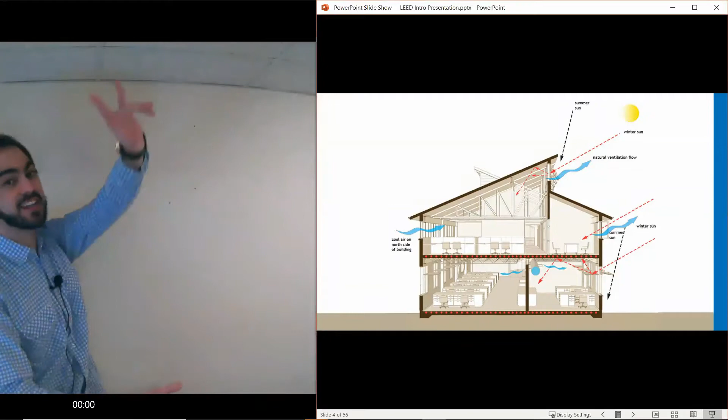Now, this is what modern day passive ventilation and passive solar looks like. If you look up at the sky in the summer, the sun shines on a high southern angle tilt. In the winter, it's at a very low winter tilt. Block the unwanted heat from the summer sun with overhangs on the south facade, and give us free solar heat gain in the winter. Maybe you can passively cool your building.

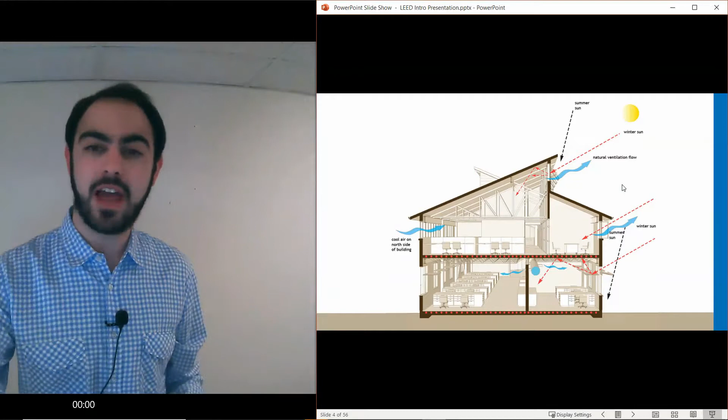There's a lot of moderate days, especially on the West Coast, and perhaps you don't need a mechanical air conditioning or HVAC system, and you can bring cool air from the north side of the building and duct it out the hot south. There's a lot of principles and design possibilities that don't rely on mechanical and electrical equipment, but can really help in not needing them to be used all the time.

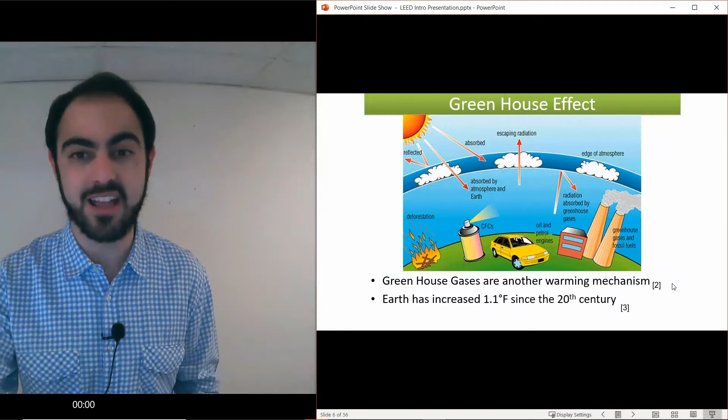Now, a little bit more history. We know we have a bit of a carbon dilemma. We've seen over history our carbon levels have gone up and down, and then since the 50s they've just been on an exponential rise. Why is that a problem? Well, you've heard of the greenhouse gas effect. That carbon, those greenhouse gases, trap extra heat in our atmosphere and create more climate change, warming, cooling, and a lot of other adverse effects on our planet, which we've always been talking about recently.

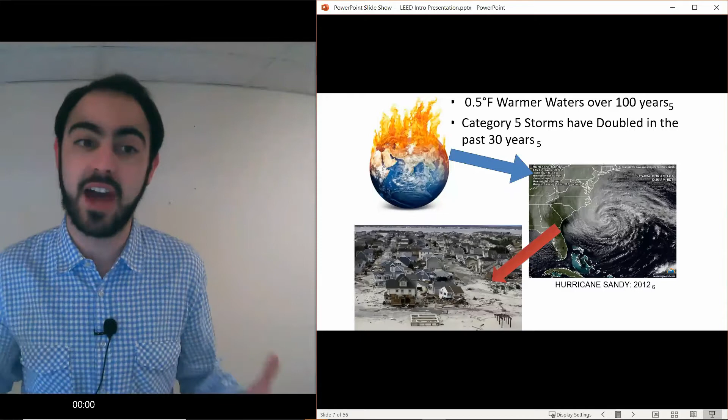Not only does the air warm, but so do our waters. Warmer waters are breeding grounds for more vicious hurricanes, and we've had enough of those in the last decade every couple years. There's drought worldwide. There's statistics that 1 out of 3 of us, every single year for the last 5 years, have been living in water stress conditions at some point. It's a real risk. Water is not infinite. In fact, it's finite, especially the fresh water, which I'll talk more about.

And really just combating our pollutants and other adverse effects, which are often overlooked. This is something that LEED is going to try and help fix. But there's a lot of people out there that are naysayers to climate change, regardless of the evidence.

And to those people, I kind of frame the argument in a different way. Look, the Earth is made up of a finite amount of resources, and the Earth has been generous enough to share them with us. They're unevenly dispersed. In Canada, we're lucky, we have lots of resources. However, they are finite, and the rate that we are consuming them is just nonsensical. Regardless of climate change or not, the more we use, the less we'll have, and the more expensive each resource will be. It's not efficient and it's just short-sighted. Eventually, we're going to run out. So whether it's for climate change or just because we depend on a sustainable future and actually having enough resources for future generations, this is the right place to start.

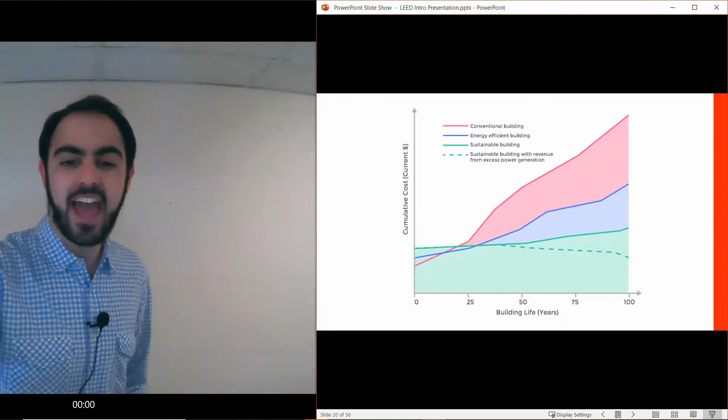I'm really hoping that if my building can satisfy a lot of people's wants and needs in each of these spheres, I'm going to get a sustainable building in the middle. When I go through all the credits, this is always in the back of my mind, thinking how these ideas relate to a more sustainable building or a more sustainable planet. It's really the basis of sustainability.

And what we just talked about was the profit side, with that high return on the initial investment to build a green building. But what about the people, you and me? Where are we coming into this conversation?

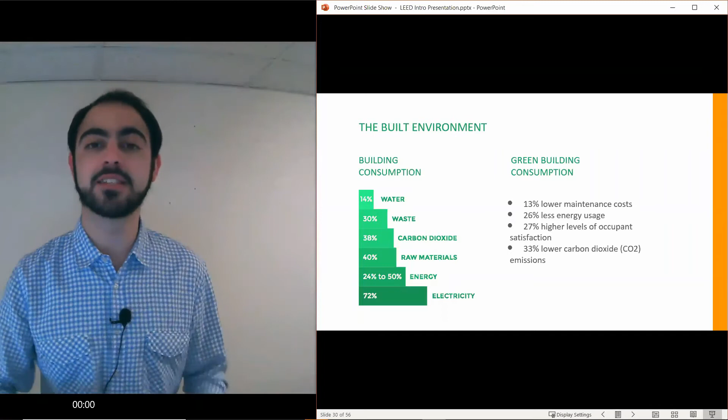So if economically it makes sense to focus on reducing our consumption as much as possible instead of building up new capacity, we should probably go for the biggest consumer, which are buildings. Buildings consume almost 50% of our energy, 72% of our electricity, and produce a whopping 38% of our carbon dioxide emissions. So if it makes sense to attack the largest fruit on the tree of energy consumption, let's do it. That is one of the largest parts of LEED in our courses, focusing on how our built environment can lessen its impact on the planet, people, society, and the economy.

I mentioned that LEED incorporates really good existing proven tools like life cycle assessment, which is out there, but people often overlook or don't incorporate it. LEED takes these principles and incorporates them within the credits, so often builders use them without even knowing. The whole idea of life cycle is not just looking at one stage of a product or building's impact, but its entire life—what happened when you transported it, used it, created it, end of life, where does it go?

I get into these a lot more in my classes, but these are kind of the 7 ways and impact categories of what LEED deems as important. So you see, number 1, we're trying to reverse our contribution to climate change. We're looking at human health and well-being improvements, protecting our water, our biodiversity, our other resources, a greener economy, and just overall social equity are the impact categories we talk about.

Now, I just want to briefly touch on the different rating systems. I mentioned them when talking about the LEED AP. One thing I love LEED for, recognizing over the years, is different buildings have different needs from a sustainable standpoint. So there's 5 rating systems, which I mentioned already, for new buildings, for existing renovations, retrofits. But within each of those, there's also market adaptations, because a new school has a few unique credits versus a new data center. They've really made it a lot more specific and pertinent to the building types, which I like.

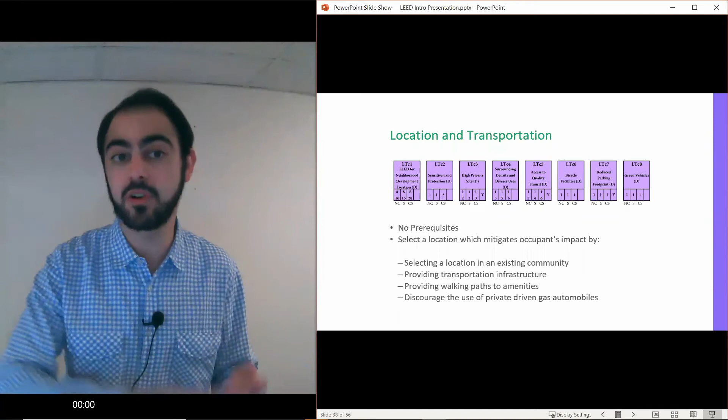We look at how people are going to get to the building. Is everybody driving alone in a big gas guzzler, or is there access to public transit? Is it bikeable? Do we have green vehicle and carpooling incentives? And that's location and transportation.

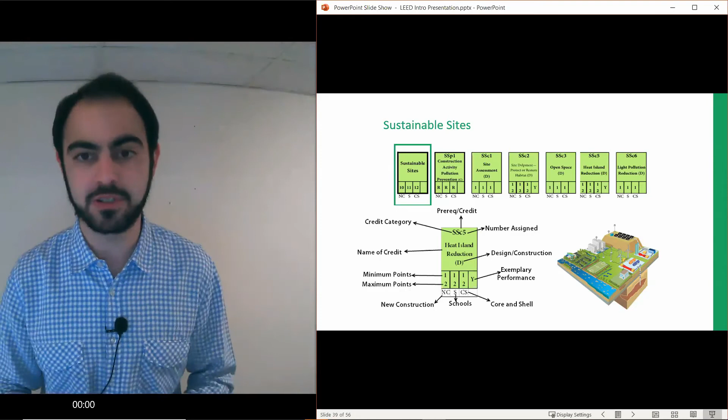Sustainable sites, and this is my little legend about how I've named the credits, which you don't need to know until you take the class. Sustainable sites looks at construction pollution, managing rainwater, reducing the heat island effect and light pollution—everything to do with the actual site itself.

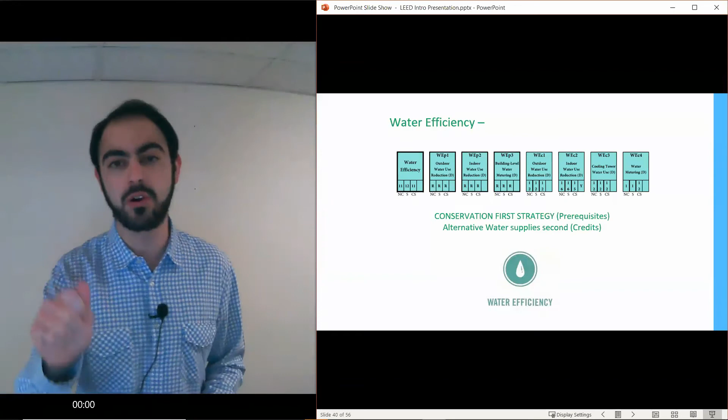In water, we look at water efficiency not only inside the building with our flush and flow fixtures, but also outdoor water use with our irrigation, and perhaps using non-potable water, such as recycled rainwater, to offset our other potable water uses. It's all about lowering potable water usage in and around the building, because it's a finite resource.

Energy. Look at Canada—we're number one, we are the best, we're the worst. We use the most energy per person in the world. Crazy, why? Well, luckily a lot of people have access to energy here. Not so luckily, it gets really cold here, and it gets really hot here. And relative energy costs are cheap, so we're not afraid to use it. And that's why it looks like this.

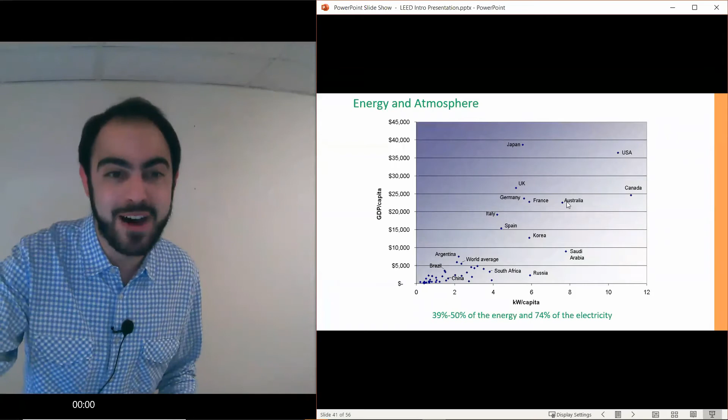But how I look at this waking up every day—this is the easiest time to get in the industry. It's the best time. We're never going to have this much to improve on. It's the easiest time to improve. So there's your Canadian optimism.

So for energy, briefly, we talk about something known as commissioning, which is really verifying that these unique systems are installed properly. We talk a lot about energy modeling, which is a whole field in itself, as is commissioning an entire field in itself. And we talk about how LEED incorporates those, and all different ways to possibly improve the energy efficiency of the building.

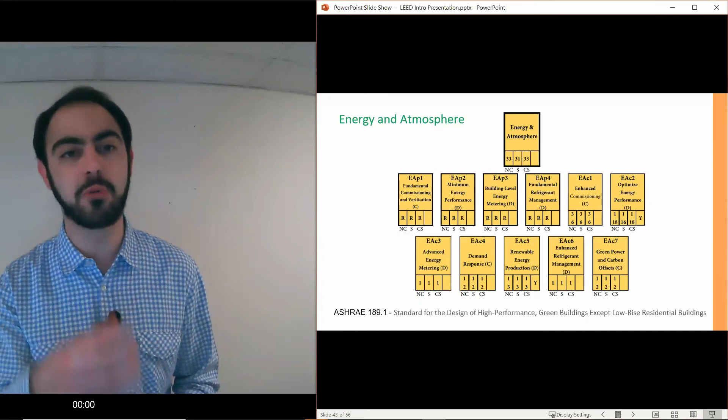Now, we also talk about refrigerants like Freon or chlorofluorocarbons in our HVAC systems, our air conditioners. We try to meter, we look at demand response programs and renewable energy generation on-site and off-site, and that's energy.

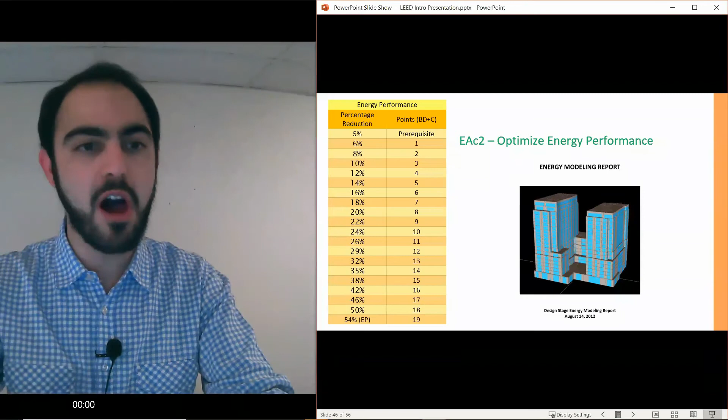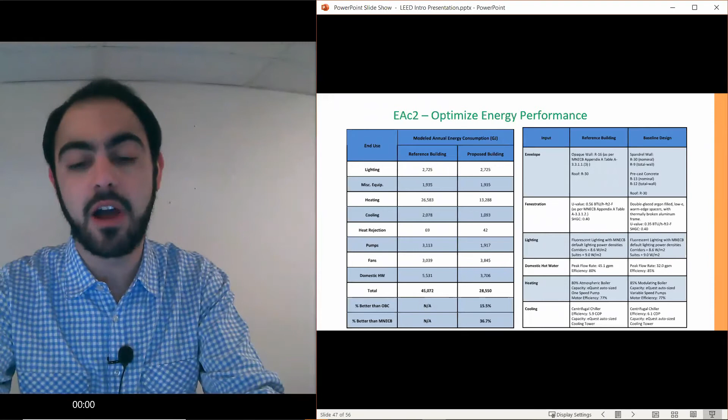This is just the energy prerequisite and credit, and I just wanted to show you an example of a baseline that we have to compare our new building to. LEED piggybacks, as I said, off of other standards to try and beat them and be green. Here's an example of an energy model and how the points break down, and the different numbers I need to collect and provide LEED with so they can verify that our building is doing what it's supposed to.

Materials and resources are our next major one, and there's two elements of it. Number one, where do your products come from and how are they made? And then, where are they going to go at the end of their life? That's the big deal behind materials and resources.

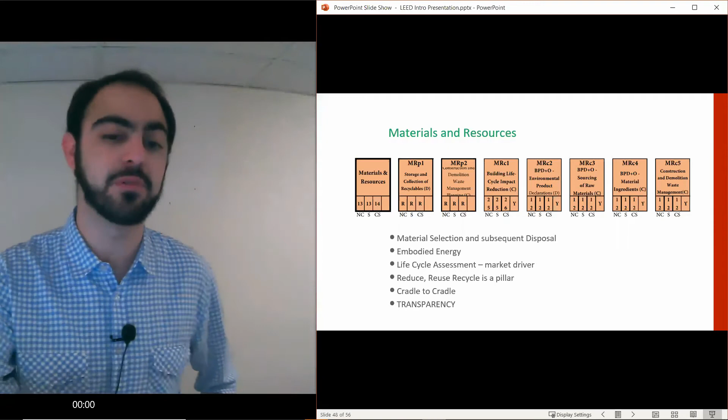This is where LEED piggybacks off of so many different product standards. LEED doesn't want to generate their own new standards when there's already working ones out there, and that's what materials and resources focuses on—sourcing your materials and products sustainably, and that they were manufactured sustainably.

Indoor environmental quality—this one has been talked about a lot in recent years, in recent days. We look at indoor air quality performance and different standards to make sure you're getting enough fresh air, combating the adverse effects of tobacco smoke, and low VOC, volatile organic compounds, in paint and adhesives, and formaldehyde and all these awful off-gassing pollutants that pollute our indoor air quality. That's all about the breathability of the air.

But our comfort is a huge factor in our daily life—not being too hot or cold, thermal comfort. Having access to a thermostat, having access to how much light I have at my desk, having daylight, having a view, and at least being able to hear myself with a high level of acoustic performance.

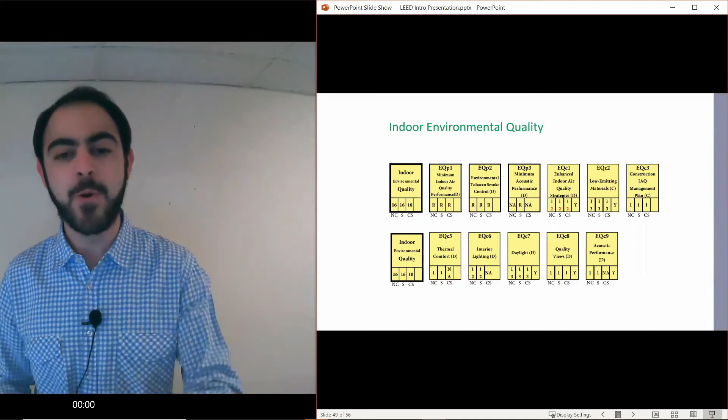This is an example of our first prerequisite that I go into detail in my class, along with a few other documentations of how to prove the credit. Then there are these two bonus categories called innovation in design, which, if you're doing something on your building that goes above and beyond or is outside of the LEED rating system but still a good idea, you can submit your own credit. You can actually create your own.

Being a LEED AP, little old me, is worth a point as well on a LEED project. So that's always an advantage, and a good reason to go for the AP when working on LEED projects. And regional priority exists because a building in Vancouver does not have the same priorities as a building in Los Angeles or Toronto. So LEED, each region selects the six most important credits and adds an extra point onto them to incentivize us to do them in that region.

I know how much information I just gave you. I tried to really cram a lot in because I thought it was interesting, especially if you're new to this whole industry. It can be a little daunting because there are a lot of directions you can take, and I hope this did a decent job of getting you excited about the potential course, and I hope you will join us.